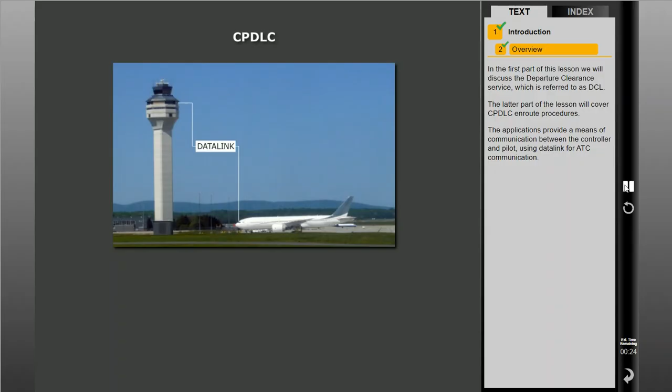In the first part of this lesson, we will discuss the Departure Clearance Service, referred to as DCL. The latter part of the lesson will cover CPDLC Enroute procedures. The application provides a means of communication between the controller and pilot using data link for ATC communication. It includes a set of clearance, flight information, and request messages. As frequencies become increasingly congested, the use of data communications to supplement routine voice communications will increase efficiency, capacity, and safety.

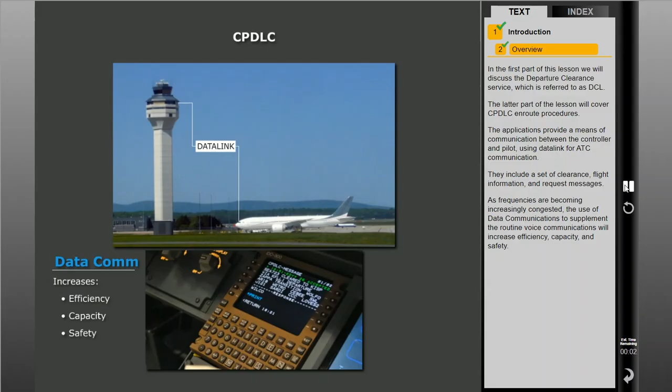The FAA's NextGen, or Next Generation Air Transportation System, is a compilation of programs designed to improve and modernize the National Air Traffic Control, or ATC, system. Some programs already being implemented include Automatic Dependent Surveillance Broadcast, or ADSB, the Collaborative Air Traffic Management Technology, or CATMT, and Data Communications, or Datacom.

NextGen will be delivered and implemented in phases. Part of the first phase involved a partnership with industry that focused on three main priorities: improved separation standards for heavy aircraft, better coordination of traffic on airport surfaces, and a streamlined departure clearance system using Datacom. Some tangible benefits already experienced include lower fuel burn, reduced carbon emissions, and improved on-time departures and arrivals.

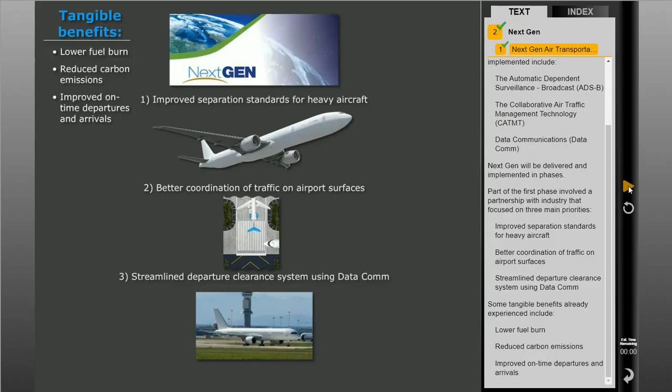The Data Communications, or Datacom, program is critical to the success of NextGen. Datacom services provide digital communications between pilots and ATC, as well as enhanced air traffic control information to airline operations centers. Datacom directly links ground automation with flight deck avionics for ATC clearances, instructions, traffic flow management, flight crew requests, and reports.

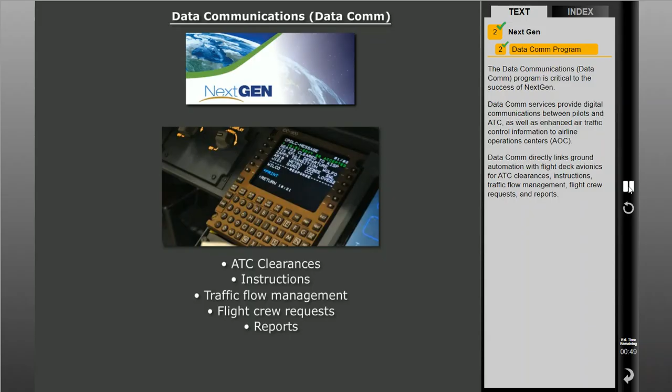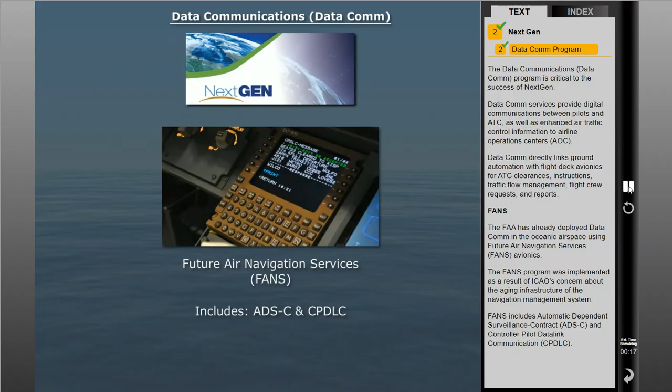The FAA has already deployed Datacom in the oceanic airspace using Future Air Navigation Services, or FANS, avionics. The FANS program was implemented as a result of ICAO's concern about the aging infrastructure of the navigation management system. FANS includes Automatic Dependent Surveillance Contract, or ADSC, and Controller Pilot Data Link Communication, or CPDLC. A generic FANS installation includes a Multifunction Control Display Unit, or MCDU, a data link system, and SATCOM.

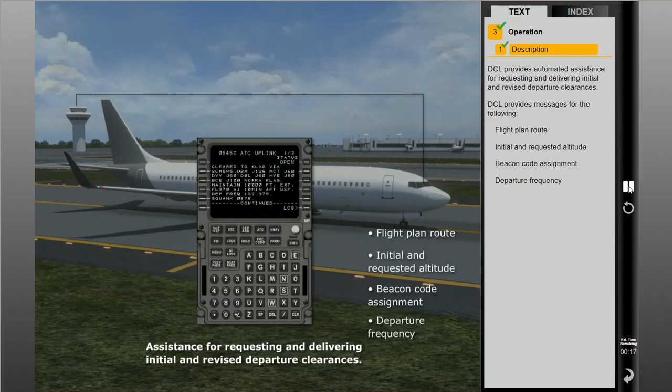DCL provides automated assistance for requesting and delivering initial and revised departure clearances. DCL provides messages for the following: the flight plan route, initial and requested altitude, beacon code assignment, and departure frequency. Messages will be selected from those already used in FANS-equipped aircraft. DCL is designed for use in surface operations and replaces the existing pre-departure clearance, or PDC, procedures.

On Datacom-enabled planes, the controller sends digital route information directly to the aircraft's Datacom receiver. The pilot reads the instructions on the screen and either accepts or rejects. Once accepted, the instructions can be loaded directly to the aircraft's onboard computer system. The DCL process takes only seconds to complete.

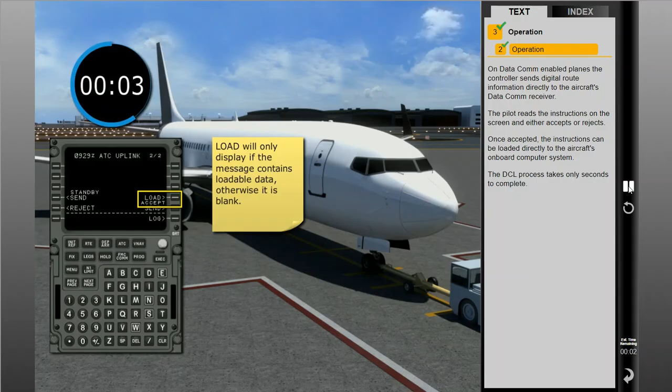Just as in current operations, dispatch will file an ATC flight plan with the Air Route Traffic Control Center, or ARTCC. ATC Automation creates a proposed DCL and presents it to the controller for review. The controller may modify the DCL with local data, such as a departure procedure, then approves or revises it. Upon delivery of the DCL to the aircraft, the automation system forwards a copy to dispatch as well.

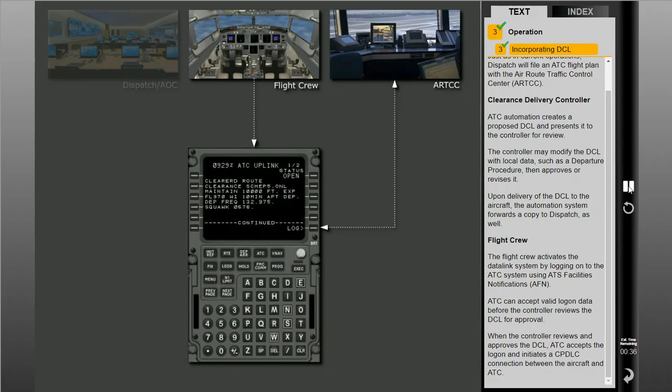The flight crew activates the data link system by logging on to the ATC system using ATS Facilities Notifications, or AFN. ATC can accept valid logon data before the controller reviews the DCL for approval. When the controller reviews and approves the DCL, ATC accepts the logon and initiates a CPDLC connection between the aircraft and ATC. ATC transmits a controller-approved DCL to the aircraft via the CPDLC connection.

If changes in tower conditions occur for weather or other reasons, ATC will amend the clearance information and transmit a revised DCL to the flight crew.

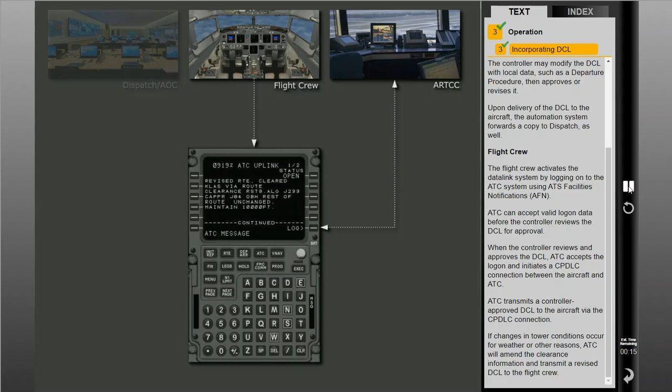Typical pilot roles include: the pilot monitoring manages the communication with ATC, and the pilot flying will verify the information and execute.

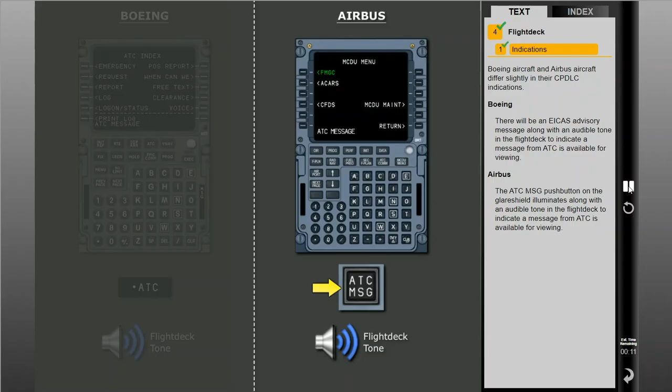Boeing aircraft and Airbus aircraft differ slightly in their CPDLC indications. On Boeing aircraft, there will be an EICAS advisory message along with an audible tone in the flight deck to indicate a message from ATC is available for viewing. On Airbus aircraft, the ATC message push button on the glare shield illuminates, along with an audible tone in the flight deck to indicate a message from ATC is available for viewing.

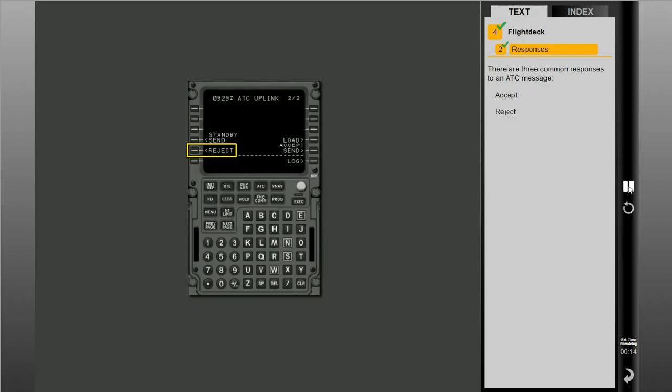There are three common responses to an ATC message: accept, reject, or standby. Standby can be used by either ATC or the flight crew if there will be a short delay in the response time needed.

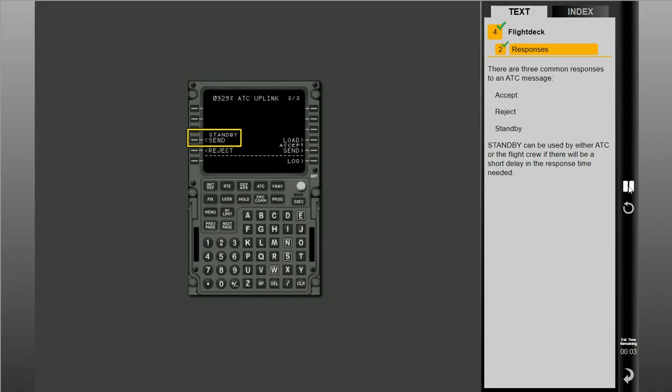The CPDLC ATC log contains the archived messages that can be reviewed. The most recent message appears at the top. Older messages will be deleted once the log is full. Typically, the message log is cleared out automatically after each flight.

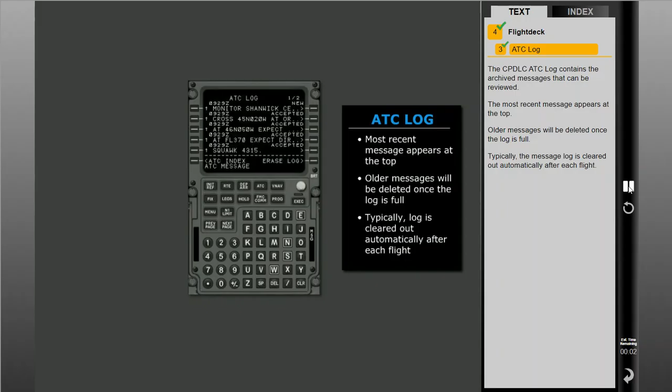Logon or ATS facilities notifications to ATC may be completed any time during pre-flight operations. Within 30 minutes of the proposed departure time, an ATC connection established message will be received by the aircraft. During high congestion operations such as inclement weather, runway changes, or large pushes, the session establishment time may be shortened.

Session establishment will occur automatically after the controller completes his or her tasks and the time parameters have been met. The logon will occur as long as the following conditions are met: the logon information was correctly formatted, an ATC flight plan is on file with indication that the aircraft is DCL capable, and ATC approved the DCL.

If the initial attempt to log on fails, ensure that a flight plan is on file. Verify the logon information is correct, and attempt one additional logon. If the second logon attempt fails, revert to voice communication and contact clearance delivery. Follow your company policy in regards to the preferred method of data communication with ATC.

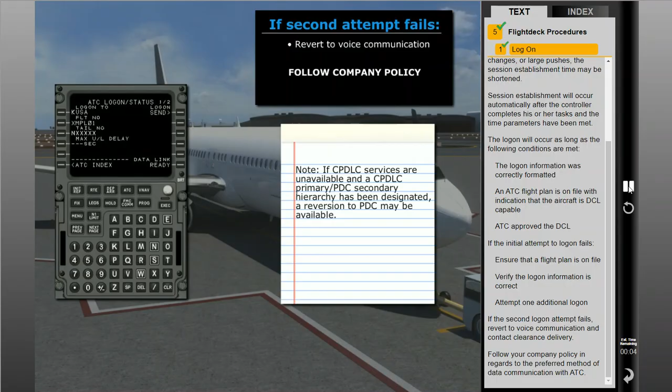Once a successful ATC connection has been established and the clearance has been approved by the controller, the DCL will automatically be sent to the aircraft. After the first received uplinked clearance, a subsequent DCL may be requested for your particular aircraft. This will result in either a full route clearance or a clearance to a specified position.

When making a DCL request, do not add any free text to the downlink page. If any free text information is added, the ground system will reject the message and send an auto-reply message indicating 'Not allowed.'

Any DCL message sent directly to the aircraft should be treated just like any voice or PDC per company procedures. An additional feature of the DCL service is the ability to introduce revisions to a cleared flight plan. Amendments can be a simple altitude change or a more complex full reroute.

When notified of a revised clearance, flight crews should use good judgment and follow their company procedures in reviewing and responding in a timely manner. Revisions can be received at any time until the aircraft is handed off to the tower for takeoff.

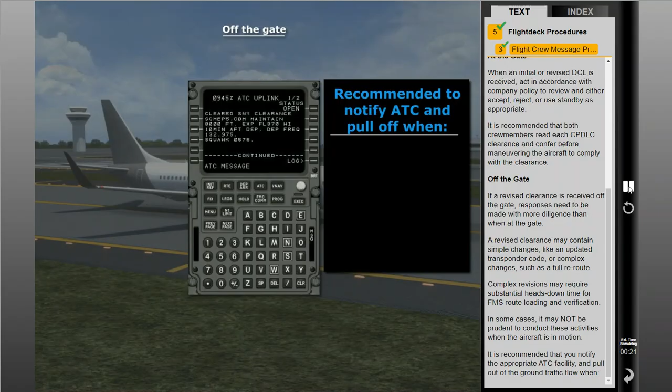Complex revisions may require substantial heads down time for FMS route loading and verification. In some cases, it may not be prudent to conduct these activities when the aircraft is in motion. It is recommended that you notify the appropriate ATC facility and pull out of the ground traffic flow when required by company procedures, in areas of high traffic density or high tempo operations, in low visibility or night operations, or required for safety of operation.

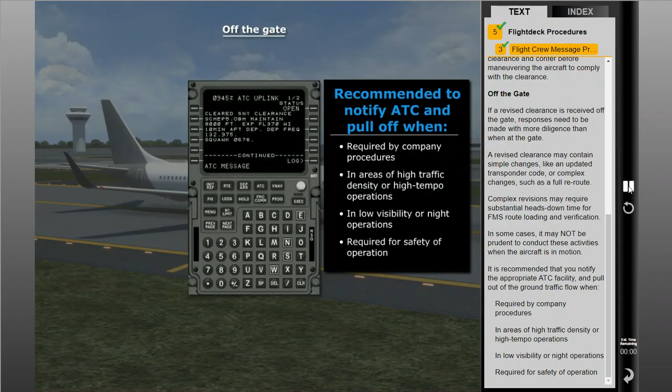The load option is available when ATC route information is included in the CPDLC uplink. Selecting load will transfer route information into the FMS route or secondary flight plan for review prior to acceptance.

Remember, the departure and departure transition are not included in the loadable route uplink and must be manually entered into the FMS when provided in the DCL.

When no changes have been made to the filed flight plan, ATC will send a cleared-as-filed departure clearance, which does not contain a loadable route clearance. In this instance, route information must be manually entered into the FMS.

If ATC has modified the filed flight plan, an FMS loadable route clearance will be sent to the aircraft with either a cleared route clearance or cleared to position via route clearance message.

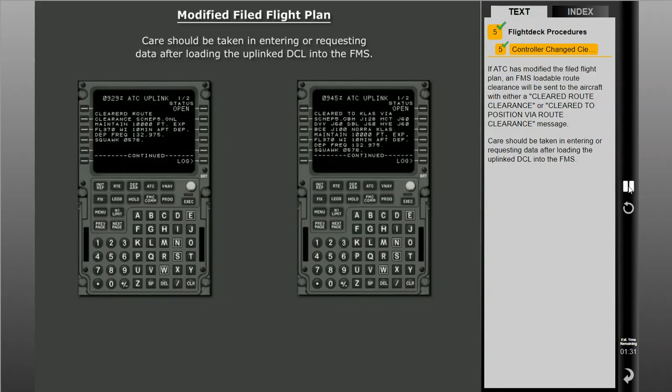Care should be taken in entering or requesting data after loading the uplinked DCL into the FMS. It is important to use the individual FMS pages to request AOC company wind, performance, and/or takeoff data, or manually enter the data per your company procedures.

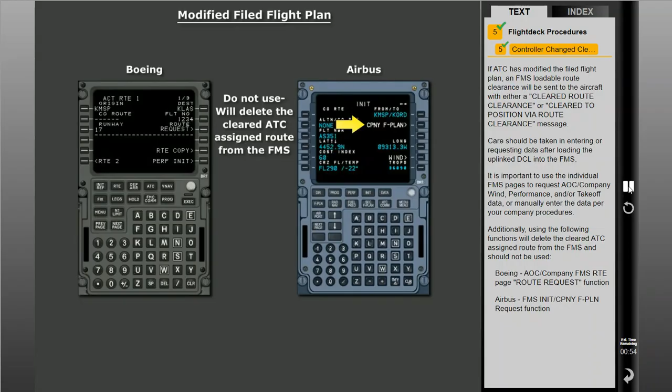Additionally, using the following functions will delete the cleared ATC assigned route from the FMS and should not be used: for Boeing aircraft, the AOC company FMS route page route request function; for Airbus aircraft, the FMS initialization company flight plan request function.

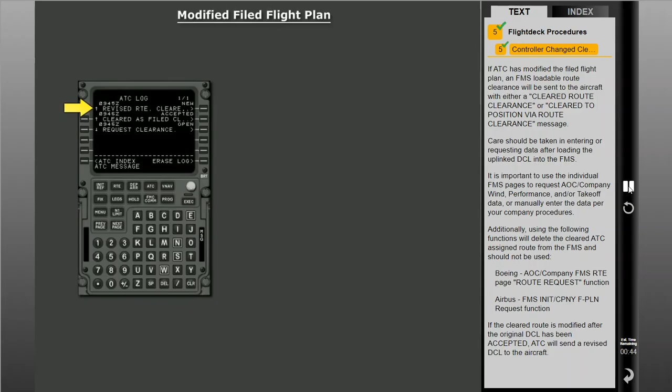If the cleared route is modified after the original DCL has been accepted, ATC will send a revised DCL to the aircraft. Remember that departure procedures, transitions, and the departure runway are always manually entered by the flight crew.

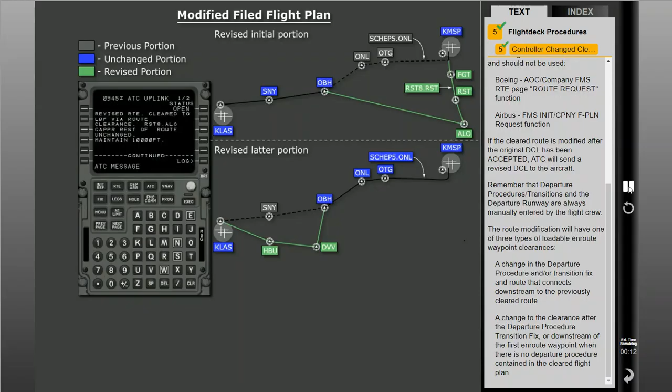The route modification will have one of three types of loadable en route waypoint clearances: a change in the departure procedure and/or transition fix and route that connects downstream to the previously cleared route; a change to the clearance after the departure procedure transition fix or downstream of the first en route waypoint when there is no departure procedure contained in the cleared flight plan; or a complete route modification.

Normally, an automated ATC-initiated disconnect can be expected within 5 to 10 minutes after takeoff. The disconnect time may be modified by local agreement for reasons such as local airspace requirements or flight crew's sterile cockpit periods to eliminate nuisance alerts.

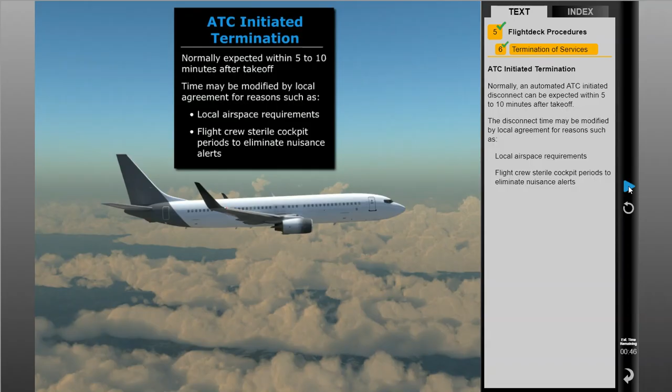If the flight crew elects to disconnect their ATC CPDLC connection, or it is terminated by the controller while on the ground, all subsequent departure clearance services with ATC clearance delivery will be handled via voice. Accepted DCLs will remain in effect for that flight unless amended by clearance delivery via voice.

At any time, you can contact clearance delivery by voice to clarify the delivered clearance, to request an amendment, when requested by ground control, or whenever safety dictates.

In this topic, we will demonstrate the logon process, session establishment, clearance requests, and CPDLC message processing.

The flight deck procedures are based on a Boeing aircraft model and assume the following: the aircraft is powered up, the IRUs are aligned, the flight plan has been filed for the aircraft tail number and flight ID, and the Airline Operations Center, or AOC, has preloaded the aircraft with the filed flight plan.

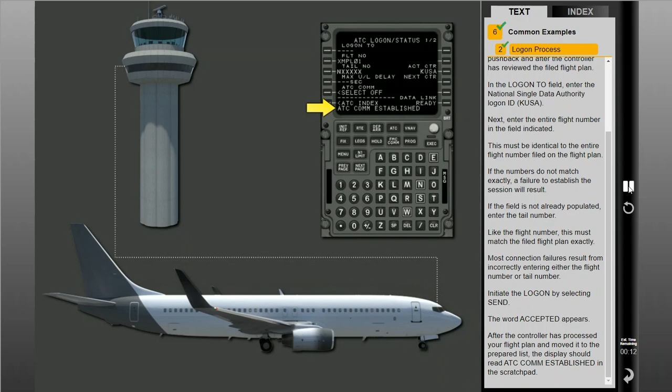Finally, verify the ATC center. Once verified, logging on to a Data Comm session is complete.

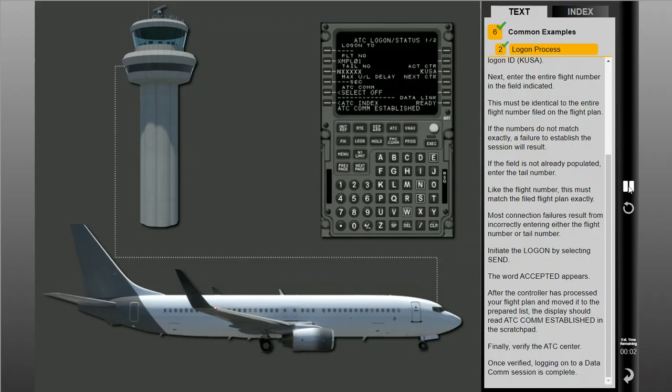In this section, we will describe how to request the departure clearance from the tower. To request the clearance, first select ATC Index.

Next, select Clearance. Do not add any free text, as this will cause the system to reject the request. Select Send. Notice the status displays Open. An audio chime will be heard when a message is received.

ATC message displays in the scratch pad. On some models, a message light on the MCDU illuminates when a message is received.

There are only two possibilities when receiving an initial clearance: cleared as filed or revised initial clearance.

Cleared as filed is the most common situation in a tower environment. First, review the message that is received by selecting Uplink. A cleared as filed message should include a SID or climb-out instructions, altitudes, a squawk code, and radio frequencies.

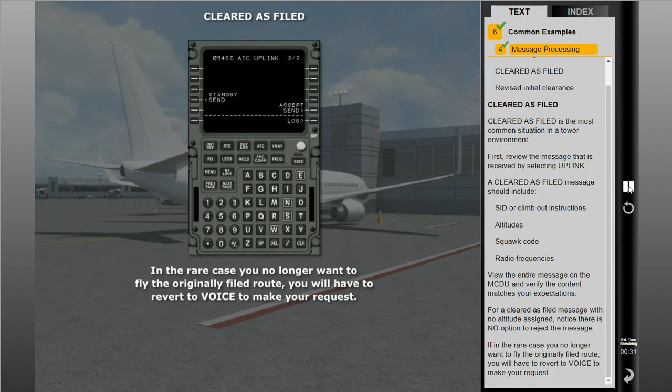If, in the rare case, you no longer want to fly the originally filed route, you will have to revert to voice to make your request. Once a cleared as filed message has been received, you will be able to reject any future revisions.

To accept the cleared as filed message, select Accept. Add the SID and transition and select Execute on the MCDU. Clean up any discontinuities in the FMS route. Acceptance of the cleared as filed route is now complete.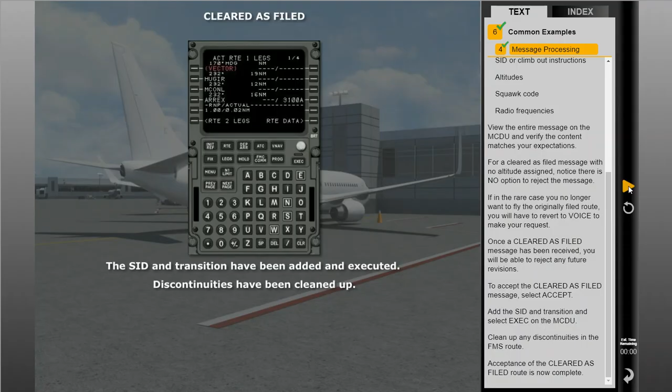If the controller cannot provide cleared as filed, a revised initial clearance will be received.

Select Uplink on the MCDU to receive the message. A new route or portion of the original requested route will be received, as well as a SID or climb-out instructions, altitude, squawk, and radio frequencies.

To review the message, load the message and page through the clearance while observing the route specifics on the MCDU and nav display.

If able to comply with the new clearance, select Send associated with Accept. If unable, select Reject. No reason code can be added to the rejection. If the clearance cannot be accepted, contact the controller by voice after sending the rejection.

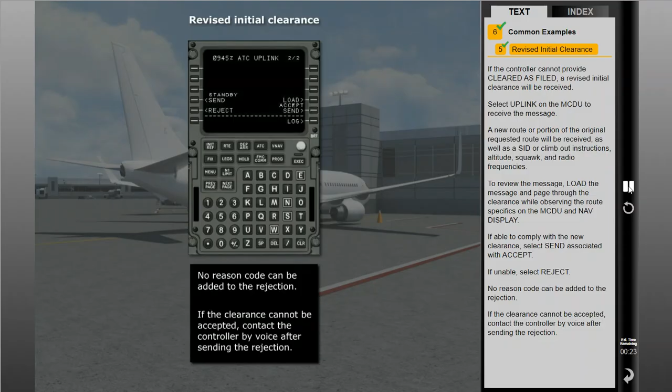Once the clearance has been finalized, add the SID and transition and select Execute on the MCDU. Clean up any discontinuities in the FMS. Acceptance of the revised route is now complete.

The last procedure we will cover is revising a clearance. Revising a clearance can be accomplished at the gate, in the movement area, or on taxiways.

In this scenario, clearance has been received and accepted, and the aircraft is pushing back from the gate when the controller has to change the clearance.

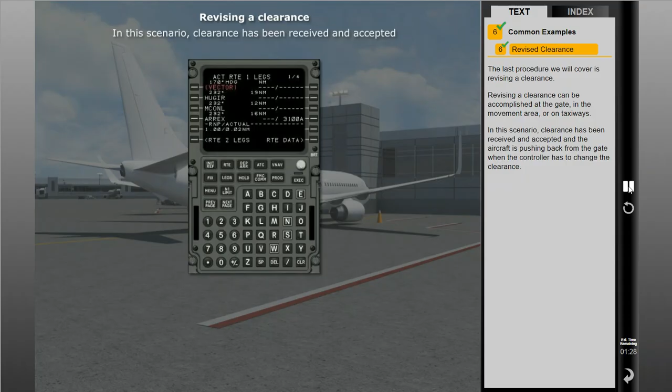ATC message is displayed in the scratch pad and accompanied by the associated audio chime to alert the crew. Select ATC on the MCDU to read the clearance. This may include a whole new route, a portion of the route, a new SID, or even a non-route revision.

Regardless of the type of revision sent, review of the new clearance in its entirety is required. To ease the workload, the revision will contain indications of what has changed.

Load the new clearance and review it on the MCDU and nav display. If the route changed, a dotted white line indicates the new route, and a solid magenta line indicates the previous route.

If able to comply with the new clearance, select Send associated with Accept. If unable to comply, select Reject.

Once accepted, add the SID and transition and select Execute on the MCDU. Clean up any discontinuities in the FMS. The procedure is now complete.

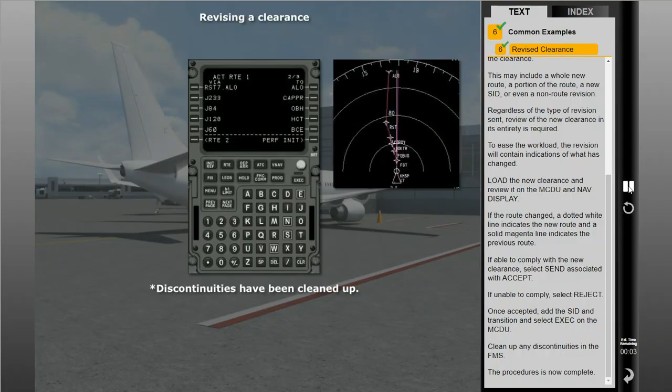Departure clearances should be processed while at the gate or while the aircraft is stopped in the non-movement area. Ideally, the departure clearance would be entered and verified before pushback.

Simple revisions of departure clearances, such as a change in squawk code, can be made while taxiing, but always use caution when the aircraft is in motion.

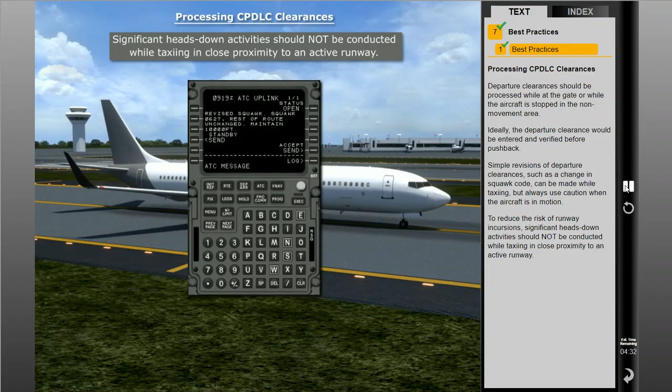To reduce the risk of runway incursions, significant heads-down activities should not be conducted while taxiing in close proximity to an active runway. As with other complex tasks, revised departure clearances that require substantial data entry, such as those involving a runway change, should be processed while the aircraft is stationary with the parking brake set.

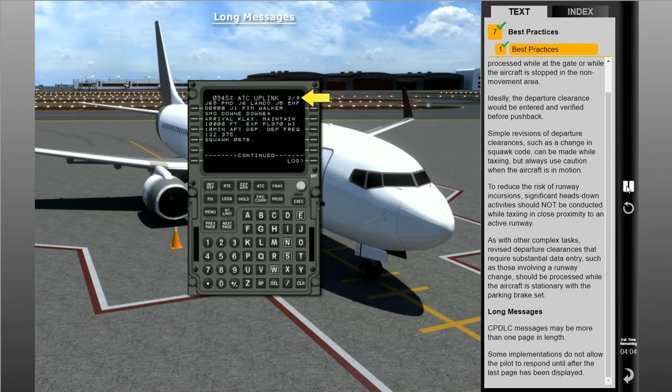CPDLC messages may be more than one page in length. Some implementations do not allow the pilot to respond until after the last page has been displayed. Therefore, care must be taken to ensure that the entire message is reviewed before a response is sent or an instruction is executed.

An inquiry or an expect message from ATC should never be considered a clearance. For example, "When can you accept?" does not constitute a clearance. Similarly, a response to your message, "When can we expect?" does not constitute a clearance.

Be aware that response times of CPDLC communications can impact air traffic operations and efficiencies. For example, the use of standby is recommended whenever additional time is needed before a message response can be given. There will be times when a standby response will not be operationally appropriate and reversion to voice communication becomes necessary.

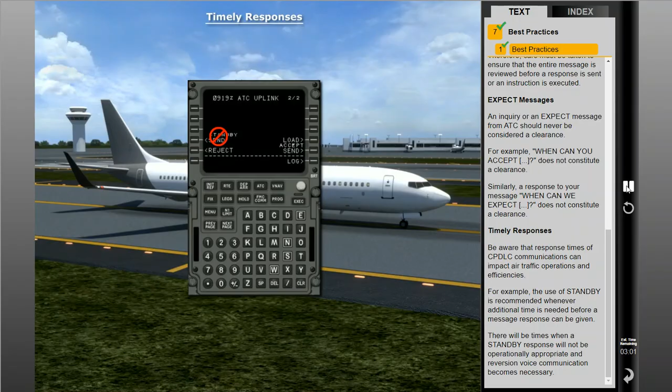Dialogues initiated on the CPDLC need to be finished on CPDLC. The CPDLC dialogue will need to be closed out with an accept or reject response, even if a verbal response has been given.

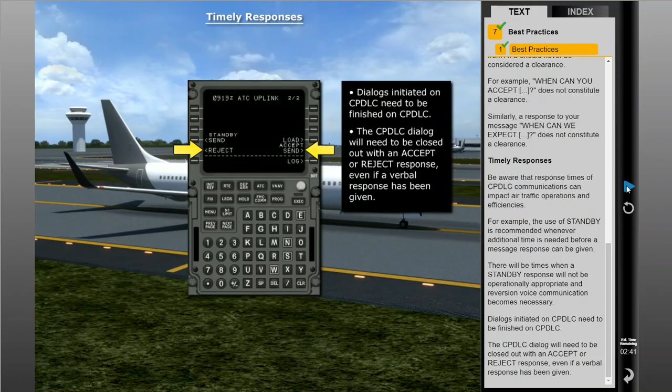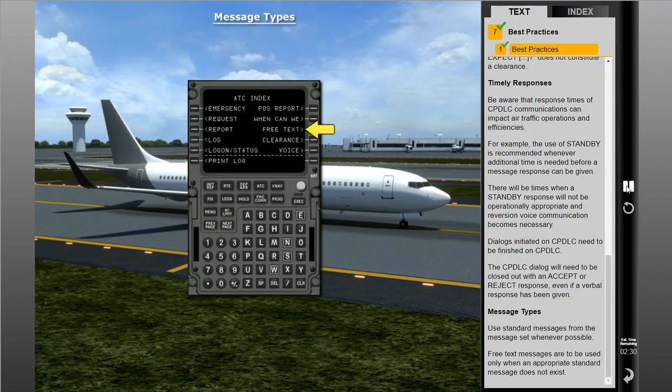Use standard messages from the message set whenever possible. Free text messages are to be used only when an appropriate standard message does not exist. When composing a free text message, standard phraseology and format should be used. All non-essential words and phrases should be avoided. Abbreviations should only be included in free text messages when they are part of standard ICAO phraseology.

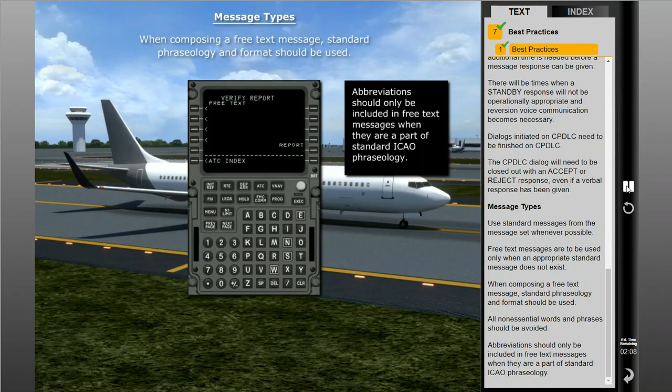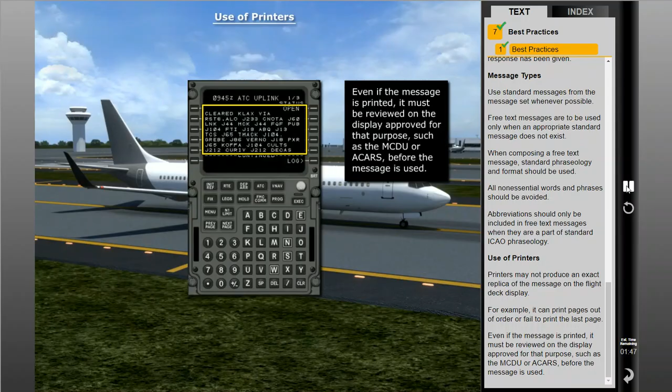Printers may not produce an exact replica of the message on the flight deck display. For example, it can print pages out of order or fail to print the last page. Even if the message is printed, it must be reviewed on the display approved for that purpose, such as the MCDU or ACARS, before the message is used.

Conditional clearances, such as those that instruct you to act at or by a particular time or position, require special attention. Operational experience has found that a common error is to miss the condition, such as the word 'at', and climb or descend immediately rather than wait until the condition is satisfied.

Therefore, it is recommended that each pilot perform the silent read, confer, and then execute procedure to help alleviate communication errors.

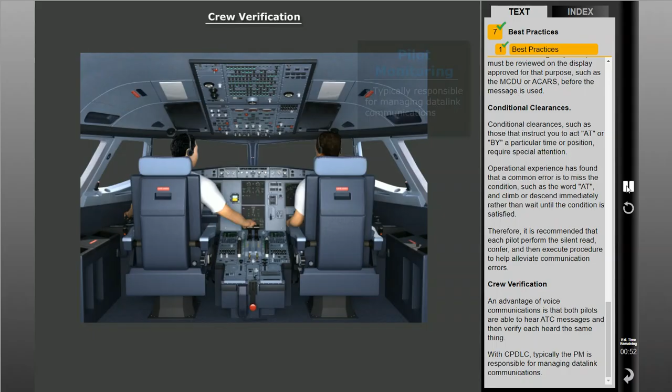An advantage of voice communications is that both pilots are able to hear ATC messages and then verify each heard the same thing. With CPDLC, typically the pilot monitoring is responsible for managing data link communications.

To maintain situational awareness, implementation of crew verification procedures in regards to datacom is wise. It is recommended that both the pilot flying and pilot monitoring silently read all ATC clearances and then discuss the message and response before executing the clearance.

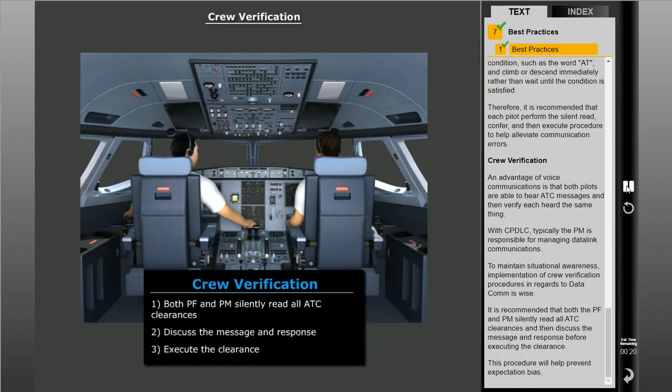This procedure will help prevent expectation bias. That is, if the pilot monitoring reads the message aloud, the pilot flying would likely see the clearance that he or she just heard, making it difficult to detect a discrepancy. Follow your company's standard operating procedure in regards to communicating with ATC.

During the en route phase of flight, CPDLC can provide direct communications between the aircraft and air traffic control. This provides Air Traffic Services Facilities Notification, or AFN, Automatic Dependent Surveillance, or ADS, and Air Traffic Control Data Link messages.

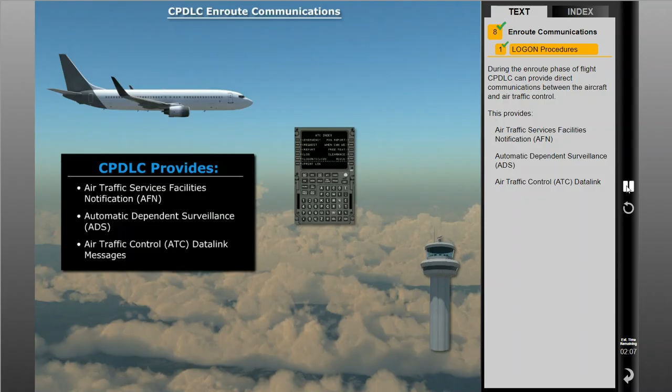Once logon is complete, data link messages can be sent from ATC to the airplane, and from the airplane to ATC. Transfer to the adjacent ATC facilities is automatic.

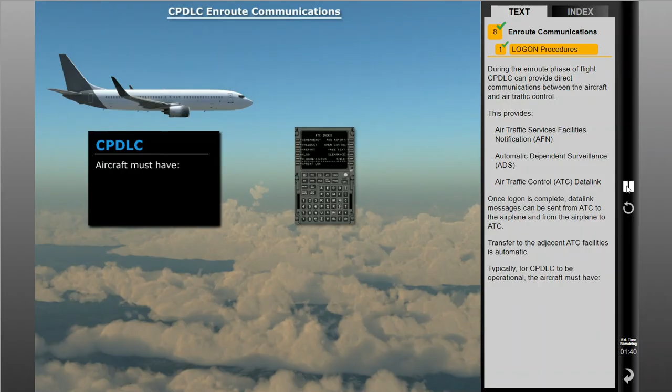Typically, for CPDLC to be operational, the aircraft must have ACARS and SATCOM for operations beyond VHF coverage.

Logon is completed using the ATC button on the CDU. When pressed, the first page displayed is the logon status page. In this example, we will log on to Gander Oceanic Control for a flight across the North Atlantic Ocean.

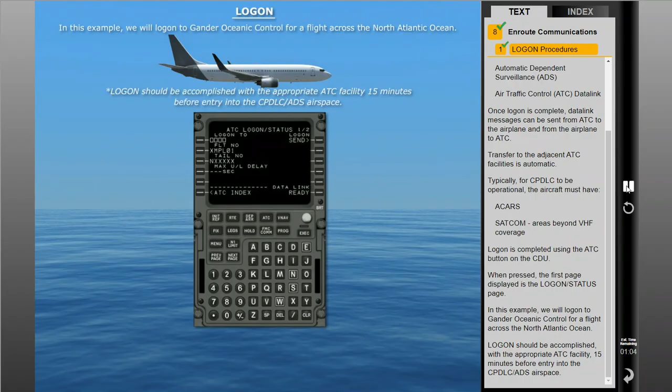Logon should be accomplished with the appropriate ATC facility 15 minutes before entry into the CPDLC ADS airspace. In this case, CZQX for Gander Oceanic is entered into the box prompts. Verify that the flight number and tail number are correct. Now, press the Logon Send prompt on one right.

Once logon is complete, ATC COMM established is shown on the scratch pad. The Active Center displays the current ATC facility, and the ATC COMM Select Off prompt is displayed, which, if selected, will terminate the data link connection.

Page 2 controls the ADS status. The ADS system can be toggled on and off. The ADS emergency mode can be turned on and off.

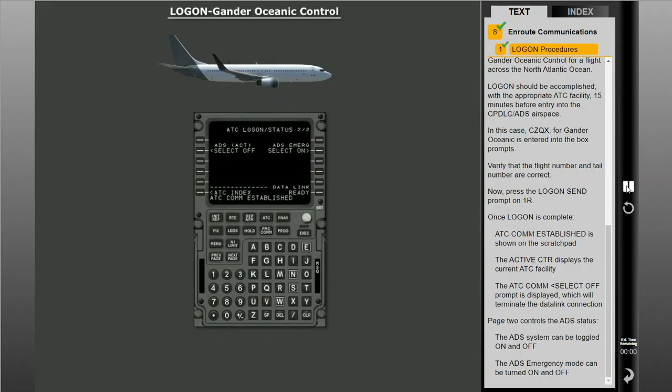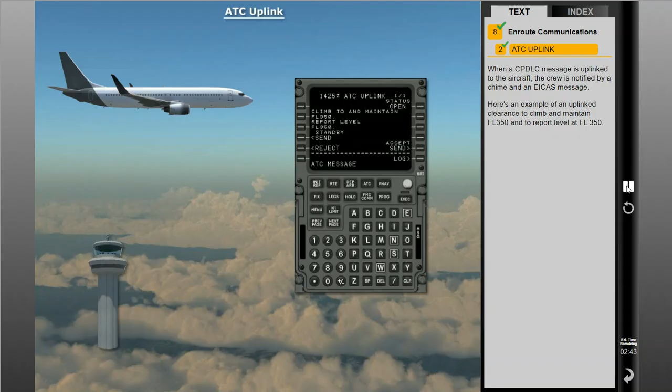When a CPDLC message is uplinked to the aircraft, the crew is notified by a chime and an EICAS message. Here's an example of an uplinked clearance to climb and maintain flight level 350 and to report level at flight level 350. Both crew members should silently read and consider all pages of the message individually, and then, after considering the content, either accept or reject the clearance.

Let's accept the clearance. After pressing the Accept prompt, our response is transmitted to ATC. Notice that the Report ARM prompt is now available on the CDU.

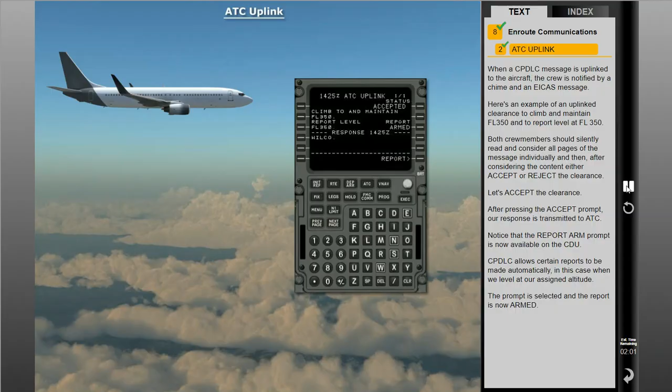CPDLC allows certain reports to be made automatically, in this case when we level at our assigned altitude. The prompt is selected, and the report is now armed. As the aircraft levels off at flight level 350, the report is automatically sent to ATC.

As an alternative example, let's take the previous scenario and reject the clearance. To respond unable, the Reject prompt is selected, and we can choose a reason we are unable to climb. In our example, it is because the aircraft is too heavy, so due to performance is selected. Now the report can be verified and sent to ATC.

If an uplink message contains data that can be loaded into the FMC, a load prompt is included. A good example of this would be a route change by ATC. The message contains the new route and the load prompt. After the clearance is accepted, pressing the load prompt inserts the new route into the FMS. The crew can then review and execute the new route.

Uplinked and downlinked messages can be viewed at any time by selecting the log prompt on the ATC uplink page, or by selecting log from the ATC index. On the left side of the message, an arrow indicates if the message was uplinked from ATC or downlinked by the aircraft.

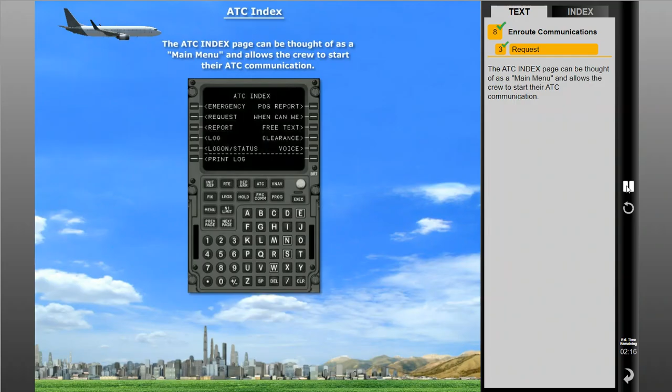By selecting the message, you can see Level 350 and the message's status. The ATC index page can be thought of as a main menu and allows the crew to start their ATC communication. Many of the pilot downlinks begin with the request prompt. Changes to altitude, speed, offset, and route can be made. In general, the format for these requests are similar.

For example, let's request a climb to flight level 370. Select altitude from the request page and enter flight level 370 into the altitude field at one left.

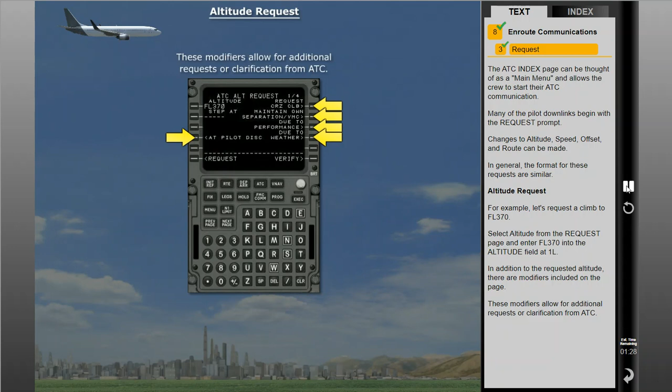In addition to the requested altitude, there are modifiers included on the page. These modifiers allow for additional requests or clarification from ATC. For a climb to reduce fuel consumption, due to performance can be selected. For a climb to establish a smoother ride, due to weather can be selected.

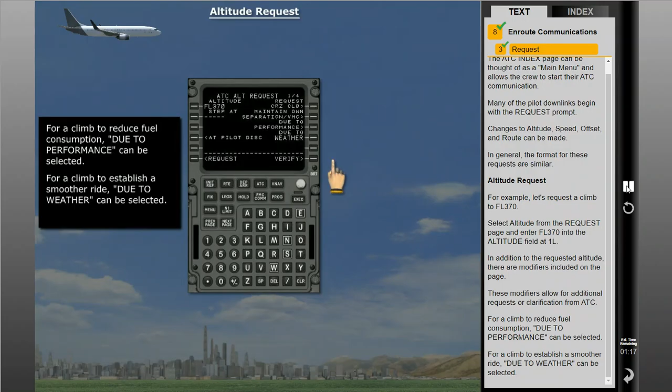Once the desired request is complete, select the Verify prompt to view the message. Once verified, the message can be sent by pressing the Send prompt at 5 right. The prompt then disappears and is replaced by the status of the message.

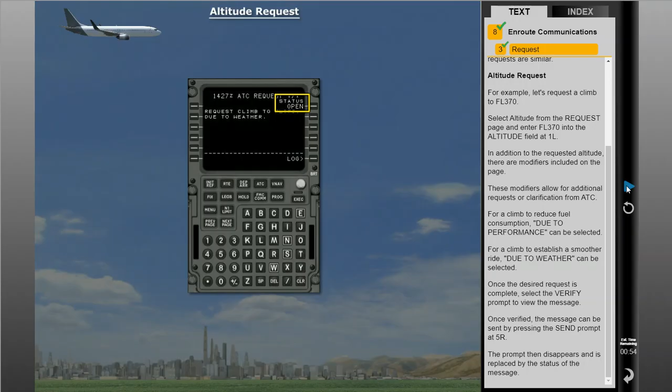Desired changes to routing can also be made from the request prompt. Direct routing to a fix, along with a specific heading or a specific ground track, can be entered and requested.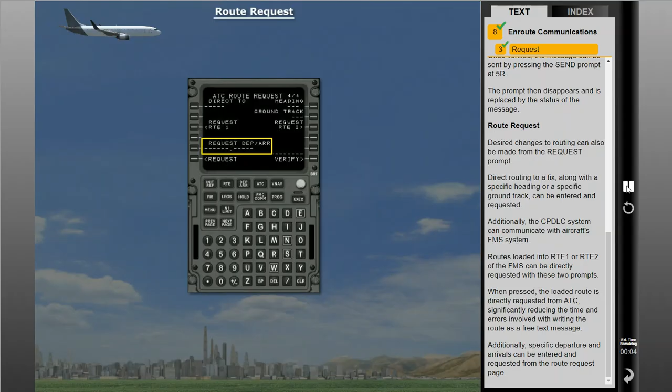Previously, we discussed how leveling at an assigned altitude can be automatically reported. This report, along with additional ATC requested reports, can be accessed through either the report page or the ATC log. For example, ATC may wish to know when we can accept a higher altitude.

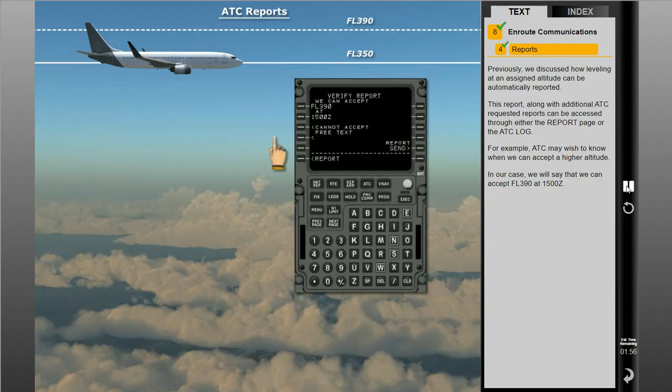In our case, we will say that we can accept flight level 390 at 1500 Zulu. Now the report can be verified and sent to ATC. The report will then be shown with a Sent status.

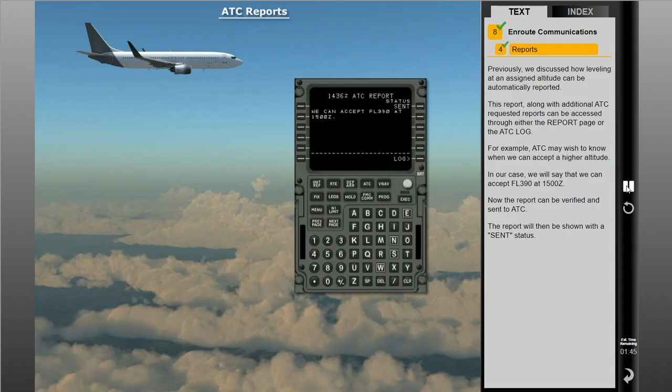As another example, ATC may want you to report back on route during a weather deviation. After the weather deviation is complete, the crew can select the Back on route prompt to notify ATC.

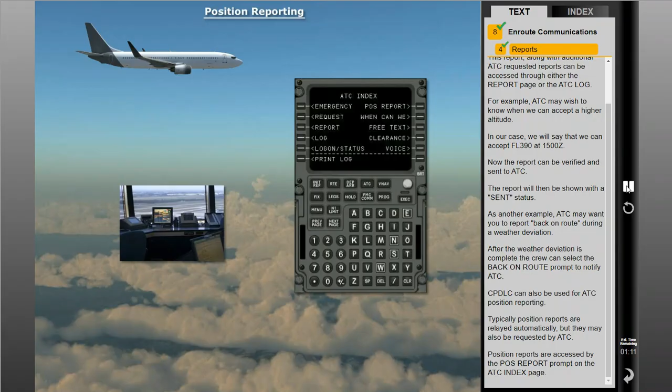Cpdlc can also be used for ATC position reporting. Typically, position reports are relayed automatically, but they may also be requested by ATC. Position reports are accessed by the Position Report prompt on the ATC index page.

On this page, the last waypoint crossed is reported in the standard position reporting format. After the information is viewed and verified, pressing the ATC Send prompt at 6 right will send the report directly to ATC.

If any ATC requests, reports, or questions don't have an appropriate field or additional information is required, the free text prompt can be used. This allows the pilot to simply type a message and send it to ATC.

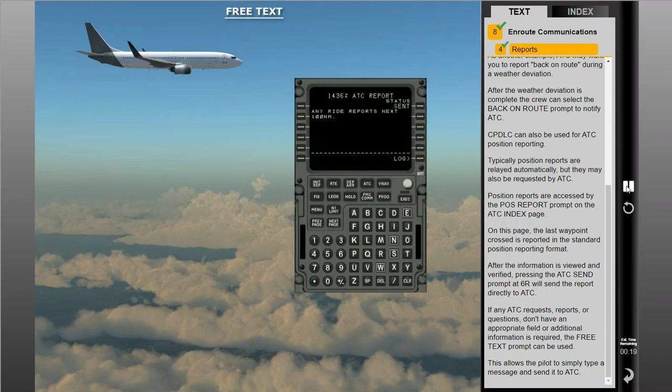If voice communication is desired instead of Cpdlc messages, a revert to voice message can be sent using the voice prompt on the ATC index page.

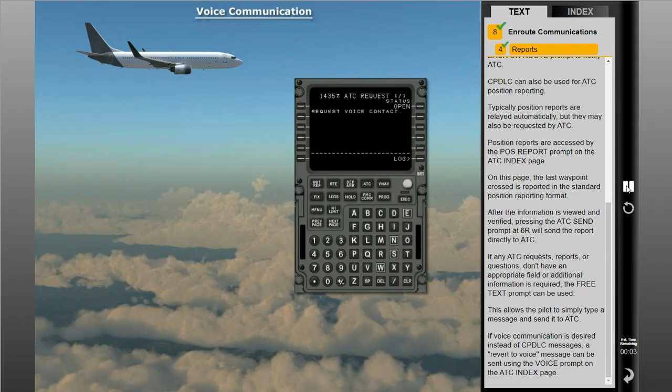An emergency can be reported to ATC using the Cpdlc system. Once an emergency is declared, ATC can immediately determine the aircraft's position with ADS and can increase the amount of position reporting during the emergency.

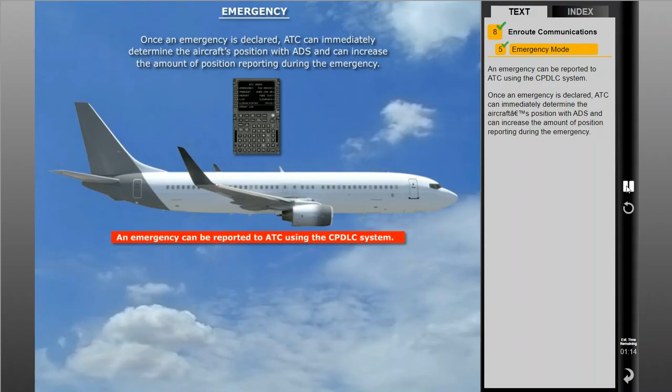Selecting the emergency prompt on the ATC index allows the crew to fill out a template that gives ATC some basic information. Depending on the severity of the emergency, either a Mayday or PAN can be declared.

The diversion airport, along with souls on board and fuel, can be stated. Any emergency route offset and descent altitude can be entered. After all information is entered, the report can be verified and sent.

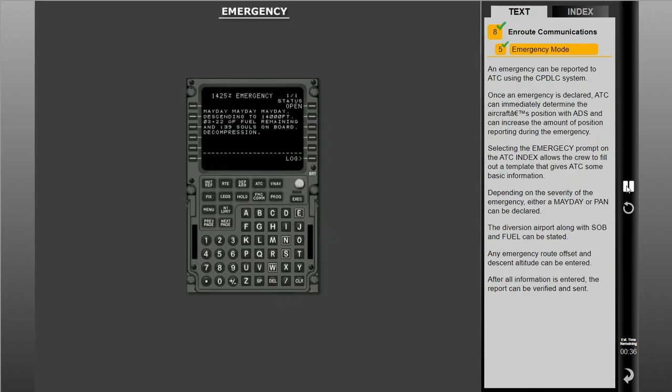Once the Cpdlc emergency message is sent to ATC, the crew should expect an immediate acknowledgement by the most appropriate means, Cpdlc or voice.

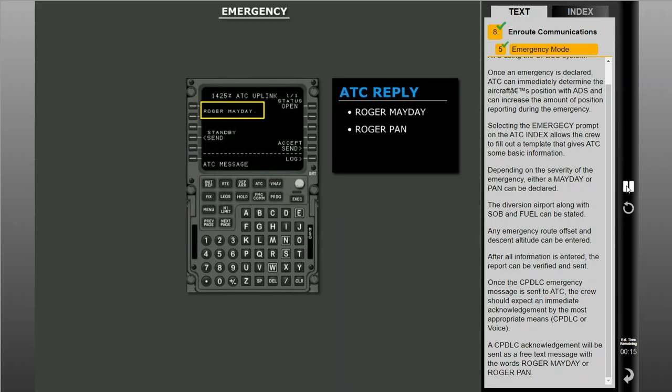A Cpdlc acknowledgement will be sent as a free text message with the words Roger Mayday or Roger PAN. In addition to a Cpdlc acknowledgement, ATC may also attempt to make voice contact with the aircraft.